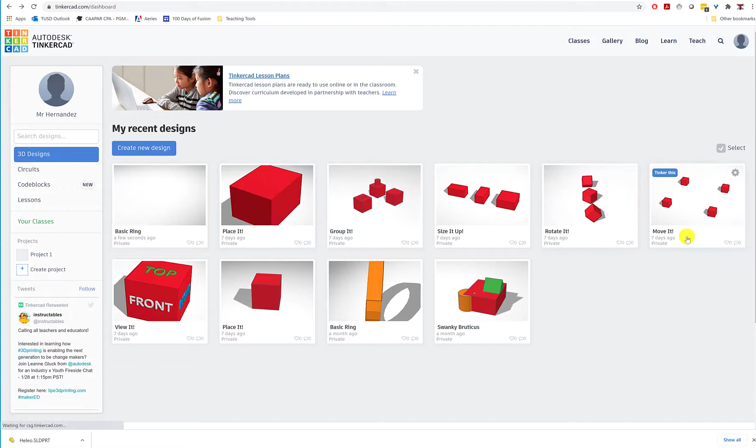So we're going to continue our journey on Tinkercad. Once you log in and go to 3D Designs, you will see some of the ones you've made in the past. We're going to go to the top right on Learn.

Select Lessons, then See All Lessons. We're going to start off with something simple. In this case, it'll be the basic ring. So I'll go ahead and click Start.

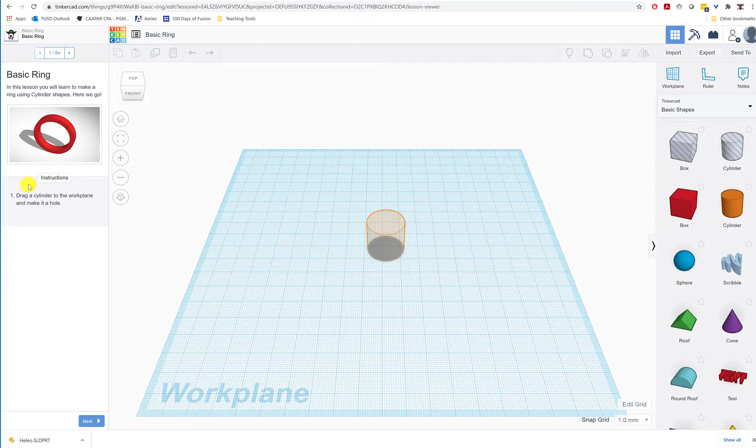And off we go. So the instructions say drag a cylinder to the work plane and make it a hole. We can take the cylinder that we're dragging here, and that is a hole already. Now if I select solid, it is solid. If I select hole, it is hole. So right now I have a hole, and I go ahead and click next.

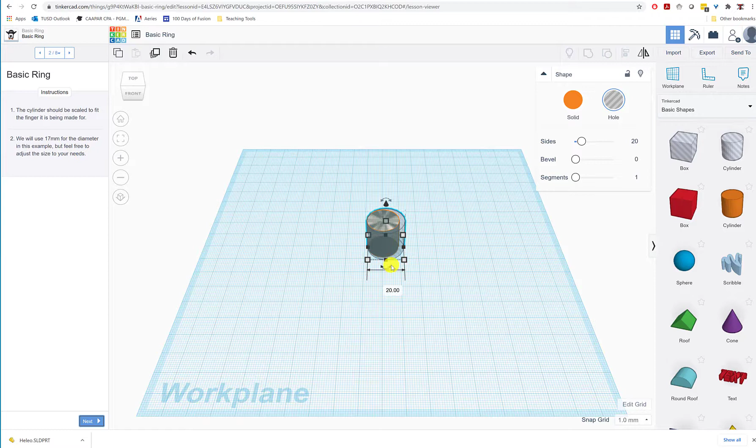It says the cylinder should be scaled to fit the finger it is being made for, and you're going to use 17 millimeters for the diameter. So we can go ahead and select in here. It says 20, so we select 17, and then select 17 on this. Now, why do I have to do it twice? Well, if I only do it on one side, it'll be kind of an oval. So right now, this is a 17 millimeter diameter for this hole.

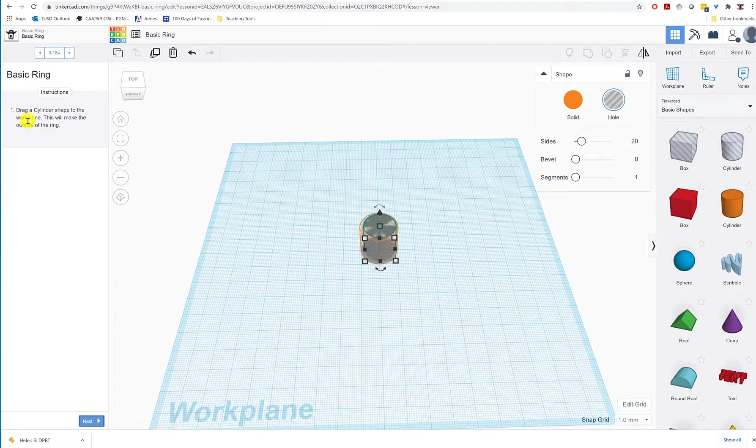Now it says drag a cylinder shape to the work plane. So I'll go ahead and drag another one. And this one is going to be the outside of the ring. So in this case, it's going to be solid.

And since we use 17 millimeters on the other one, we're going to scale the diameter to 21 millimeters. So then in this case, we're going to put in 21, and then we're going to put in 21 again. Now you could also drag it to the correct size if you want, but in this case, that's fine.

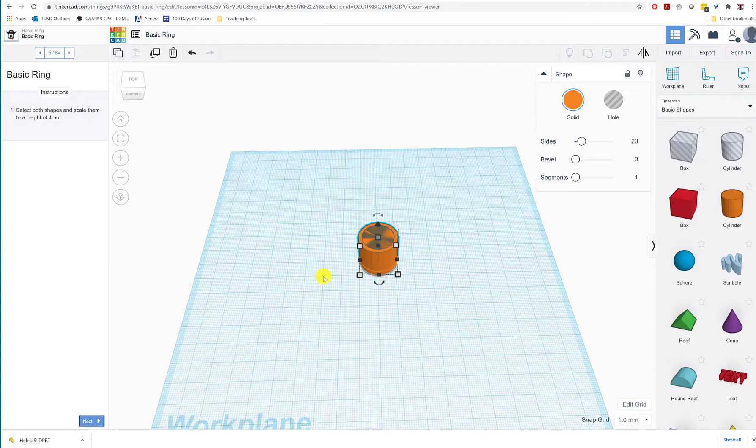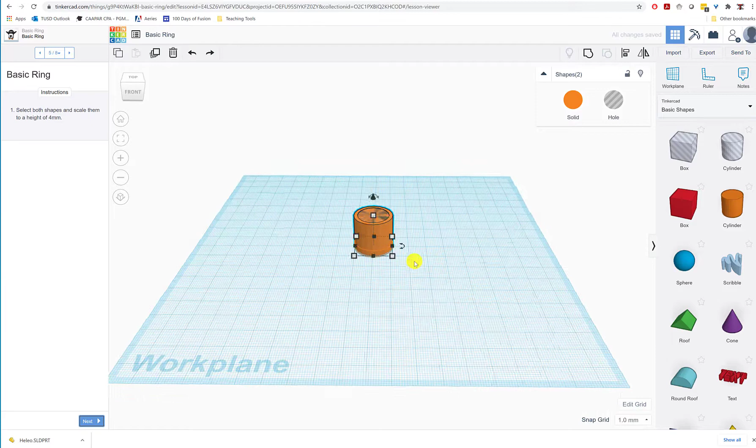Okay, so now it says select both shapes and scale them to a height of 4 millimeters. Now we have two shapes, one on top of the other. So we can select both of them by dragging like this. And then the height is going to be this guy here. Right now it looks like it's 20 millimeters in height, and we want it to be 4 millimeters in height. So we hit 4, and now it's looking a little bit more like a ring, right? Now, it looks a little wonky because of the graphics on my computer, but yours will look similar to that.

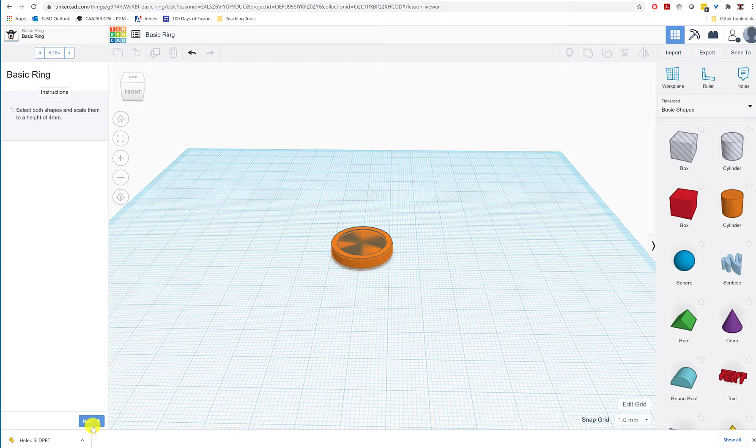Then we go ahead and click Next. Then it says keep both items selected and group them together using the Group button on the menu bar. Now, if I didn't group them, or if I wanted to reselect them, I'm going to go ahead to the top over here and click Group. And they've kind of combined, and now I've got myself a ring.

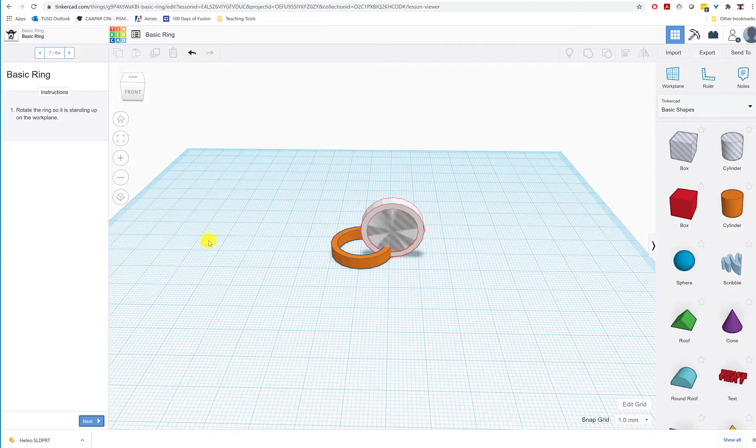So rotate the ring so that it is standing up, so I can click on here and see if I can match the instructions. Now if I wanted to, I can rotate this whole plane by right clicking, and then noticing that I can move this, I can rotate it by clicking one of these guys here. I go like that, and then I could drag it over and have it match that spot. It looks like it. There you go.

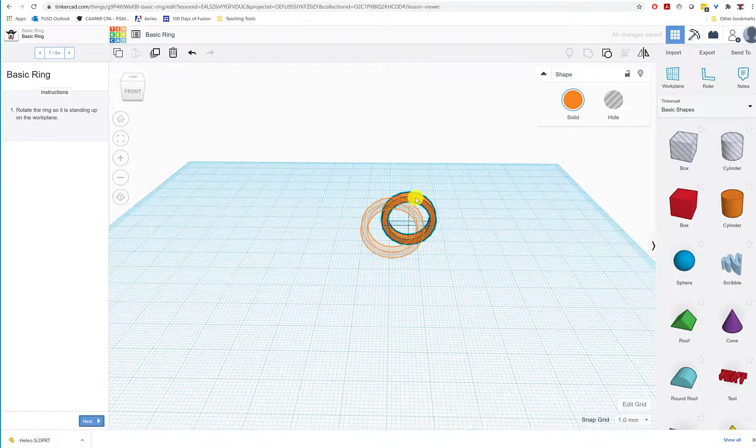Cool. So then we go to next, and we are done. So that's the basic ring, and we're going to follow some of the same steps for making others. All right, so then click Done.

Go back to the Tinkercad multicolored square, and if we want to notice, I'll have basic ring on my completed items. And then I can go back to Learn, Lessons, See All Lessons, and then I can go and make the simple heart ring followed by the diamond ring.